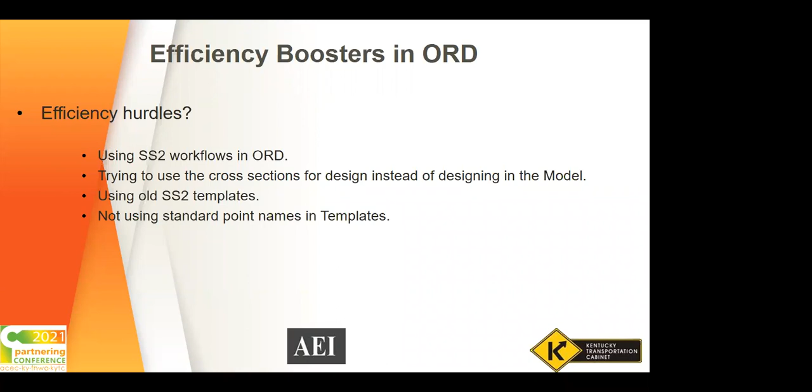We need to stop using the cross sections to design, like we did in SS2. We're supposed to be doing model-based design now. We still see a lot of people going in and trying to edit these cross sections, and it causes a lot of problems downstream. You get a lot of graphics in your cross sections that are basically saved views, and you can't pass that on downstream to our end users.

Another thing we see is using the old SS2 templates and not properly converting them for ORD. What you'll get is inconsistent point names, and the way these annotation groups are set up to display your quantities and annotations.

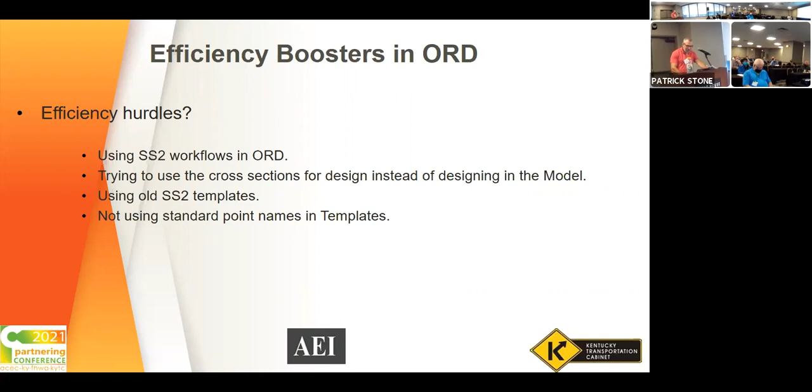Not using the standard point names in templates, just like I was saying before, causes annotation issues.

This is a new sheet border that has been approved from the State Highway Engineer's Office. We released those in the last two releases of CAD standards. The main reason for this change is to align with the named boundaries, as well as to get a little more usable space up on the sheet border.

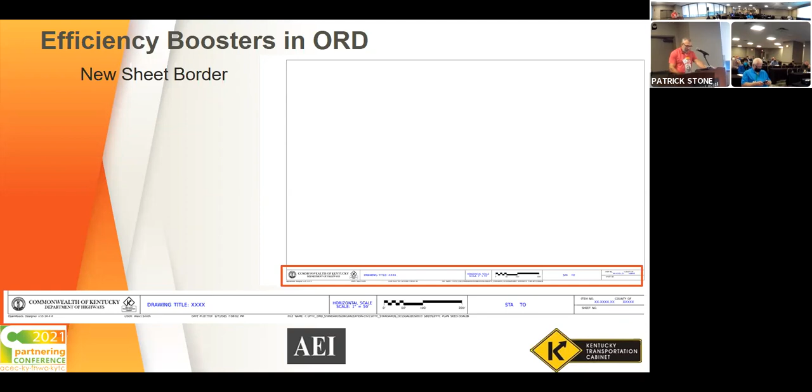One thing I want to point out is the graphic scales on here. We had to pick one to put in there because the plan sheet is one size fits all - you can put any scale on there, 20, 50. So we picked the 50 scale as the graphic. At this point that doesn't automatically update, so your sheets will be 20 scale, but it's still going to say 50.

We're open to suggestions on that. We were going to just make it blank or put question marks down there so you could edit it. But we thought it would be better to place a scale in there so we could hit, you know, most of the time what you're going to be doing, so you don't have to go into every sheet seed and edit those. We're open to suggestions on that.

I wanted to point out the pipe sheet seed for the profile. This is made for SUDA, and Robert Garrett has been doing some training for us on SUDA, and this is where we're going to start doing our pipe sheets. They've been a little problematic in the past, and we've got a system to make these now. This is the first of different scales that'll come, but this one's included in the class.

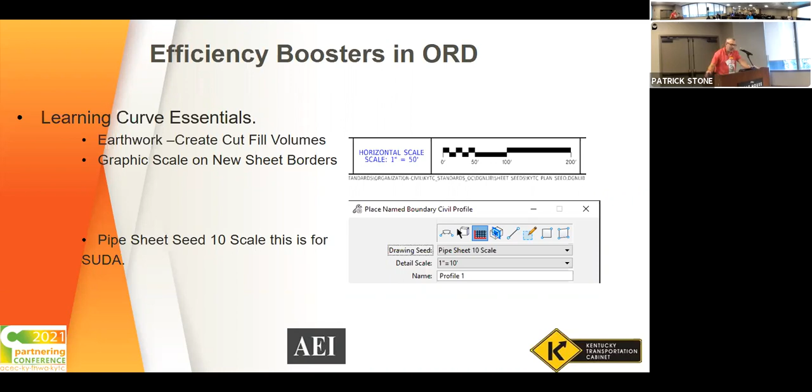Okay, and I'm going to turn it back over to Therese.

So this first video I'm going to play is just kind of an overview of the three different types of models within a DGN: your design model, your drawing model, and your sheet model.

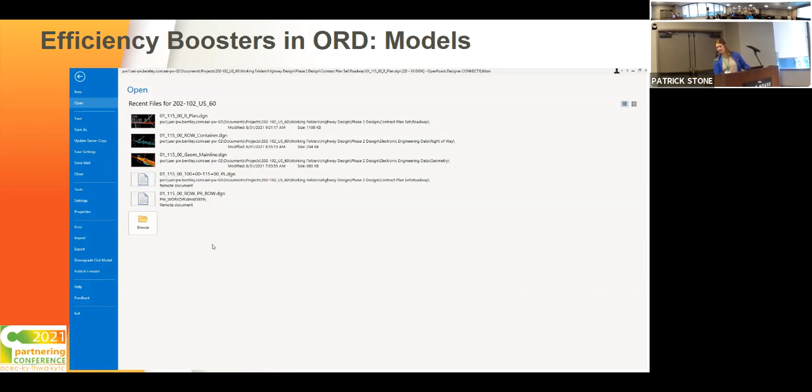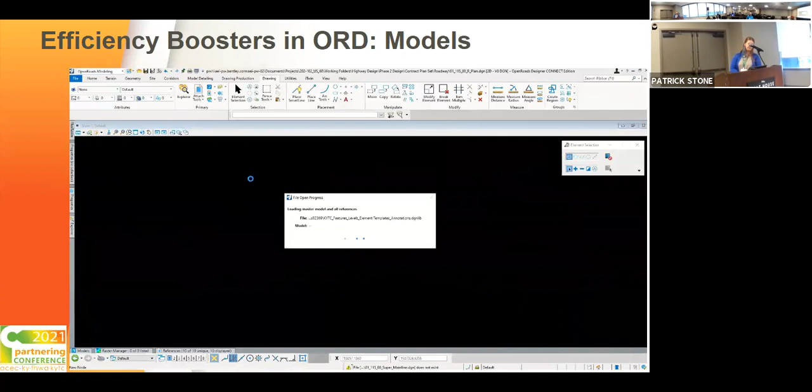So I'm going to open up my plan sheet again. The first thing here is my black background - this is my design model. Down here I look at the models. This icon, a box with a green circle, is for any design models. This design model is housing all my references - sheets, plan sheets. I've attached things such as my geometry, corridor, right of way, existing topo.

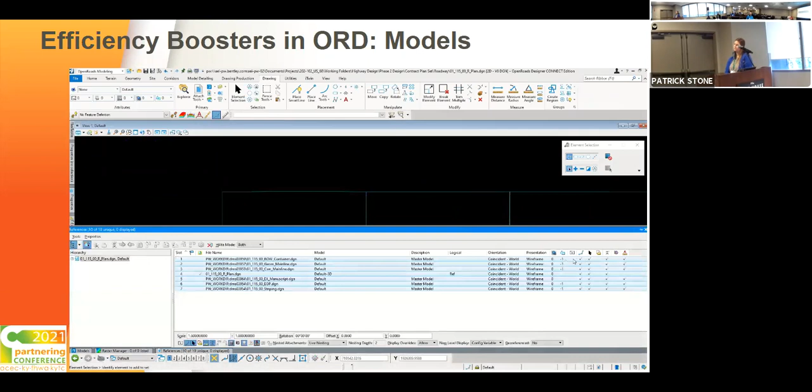You can see these are my main boundaries for my sheets, but all of the line work is just coming from references. So that's kind of your first view, your design model.

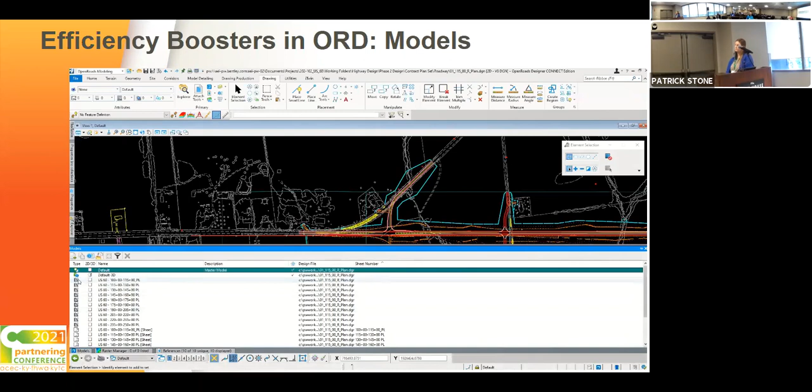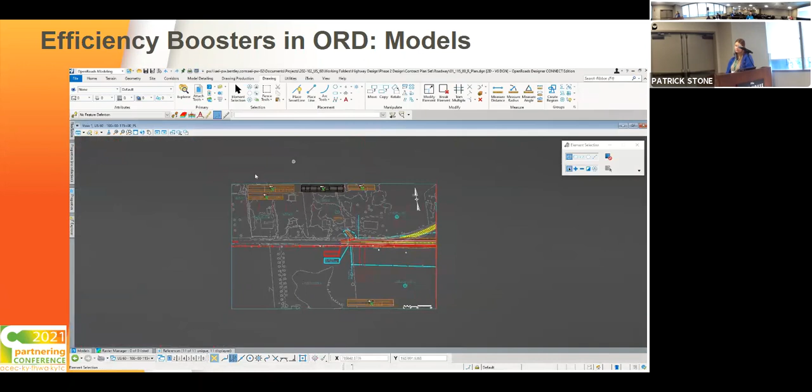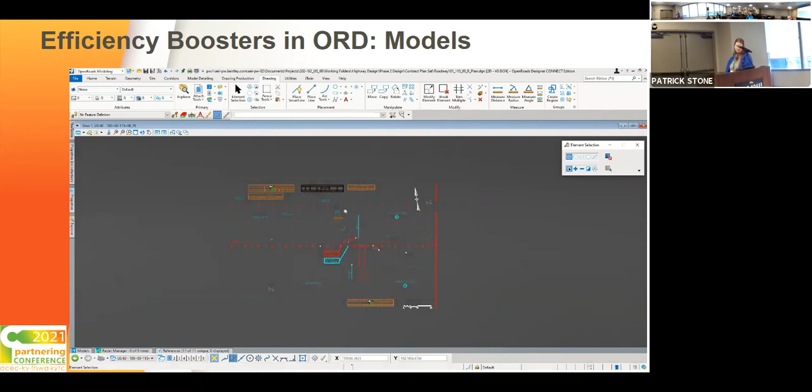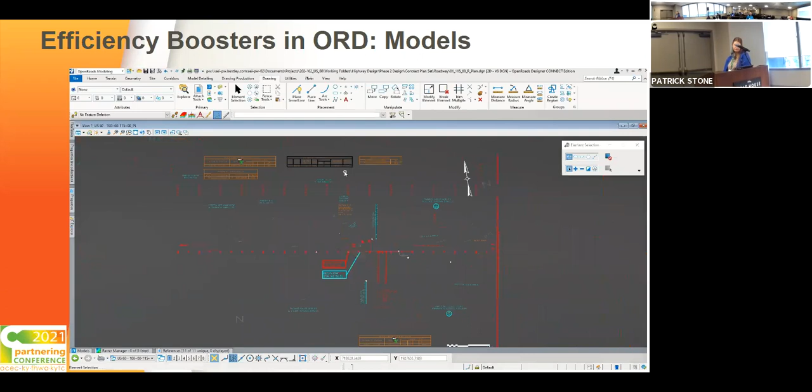Next model I'm going to switch into, that's your gray icon over here - this is your drawing model. You can see this one has a gray background. This is from the same DGN, just a different model, my reference. And if I were to turn that off, you'd see all of my geometries, corridors, right of way, topo all turned off. Only what is active in this drawing model is text, annotations, instructions, north arrow - all of this is active in this model.

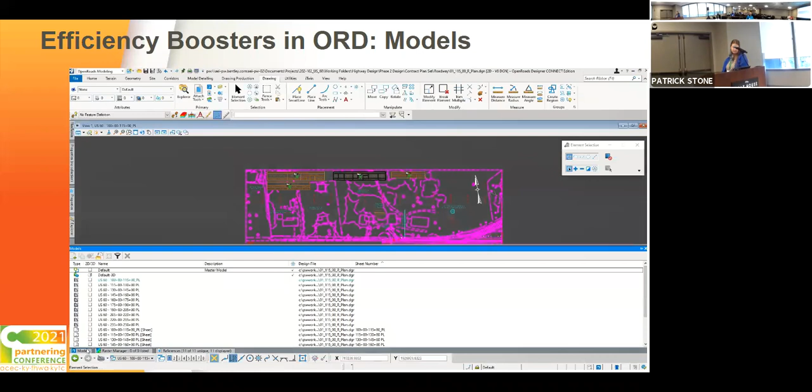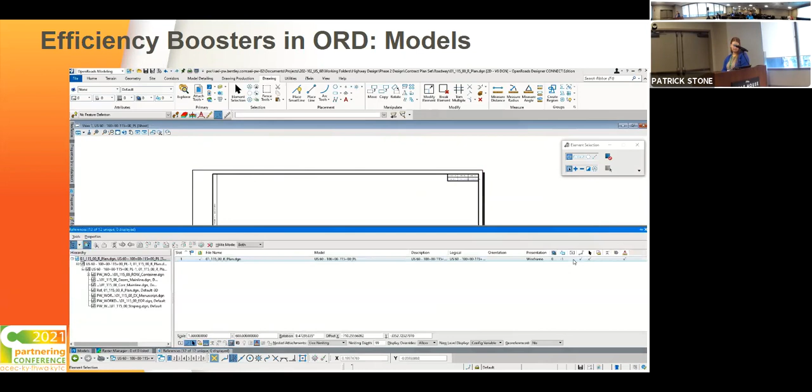Then the last view in this DGN is the sheet view, where again it's all coming from a reference - this time instead of the default model, it's my drawing model that's referenced here. If I were to turn off this reference, all that's in here is my sheet border. This one has the white background, the white icon over here. So that's just kind of an overview of the three different models within this one DGN.

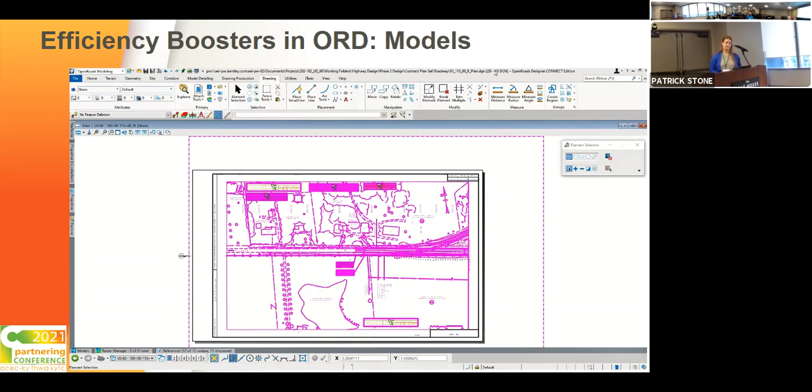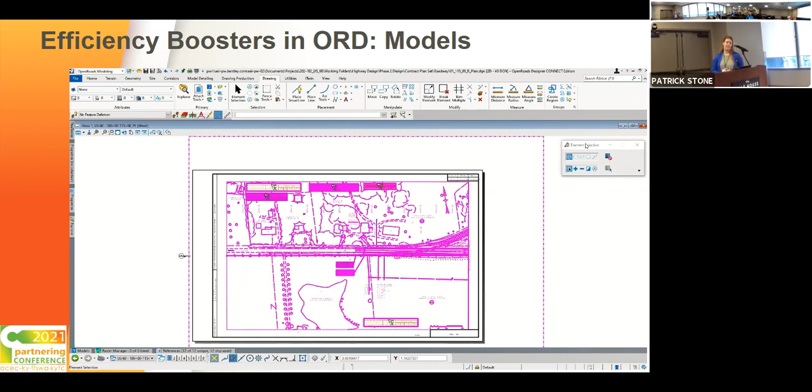So that wraps up that first video, which was just an overview of those three different models.

The next video I have kind of just talks about auto annotation. You can use that for center lines. That's what I do in this video: center lines and right of way annotation, varying distances.

I'm going to go through a few different auto annotations. I'll start with my center line, coming from a reference. All of our auto annotations are set up based on the feature definition.

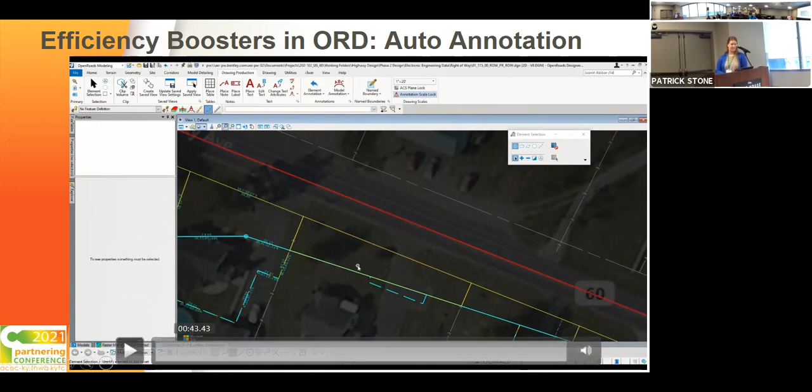And then the last video I have is just on work set properties, on how for your sheet the county and the item number are driven by the work set properties and how to update those. They're going to automatically update in your sheet.

For our sheets, this info in the top right, the county and the item number, these are being auto-generated from the work set properties, which you can find.

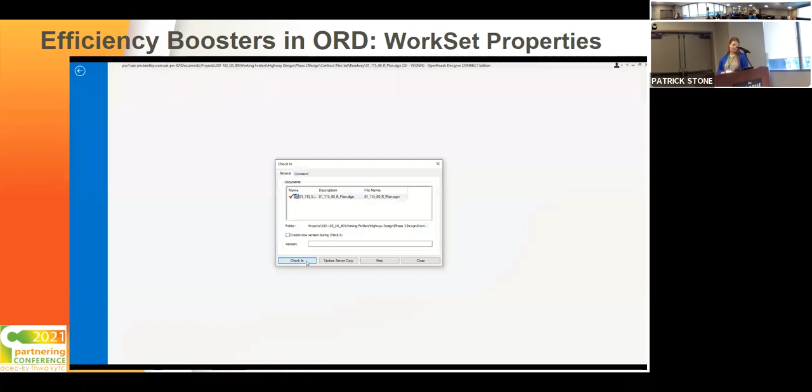File, close. Click here to edit those properties. Here. And you can add a custom property. The sheets are looking for the item number and the county here.

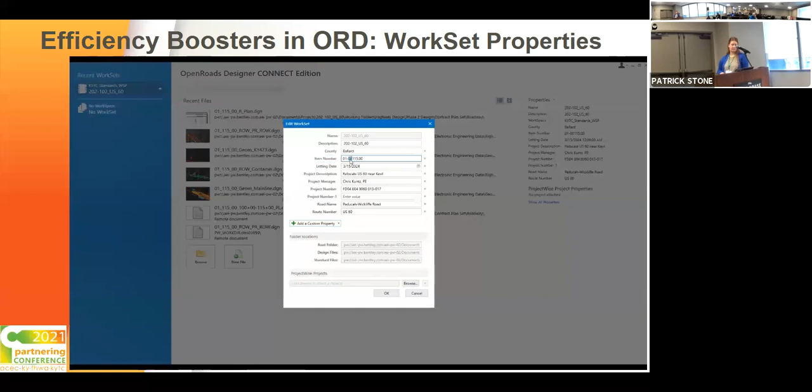So these zeros are added, and I'm going to apply to all. Back here, hit OK, there's the change. And then I'll hop back into the sheet.

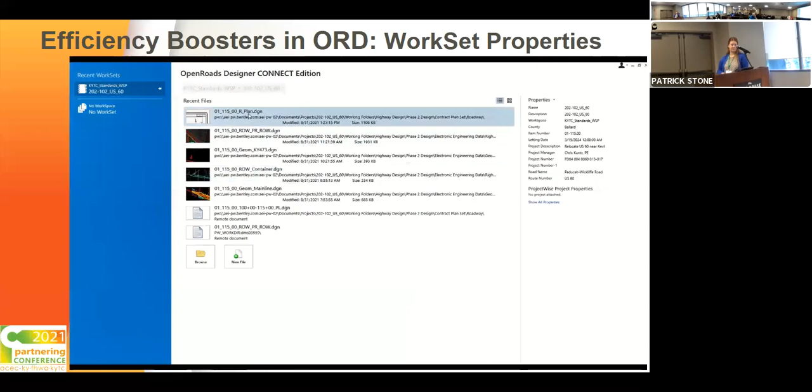And you can see that item number no longer has those two zeros.

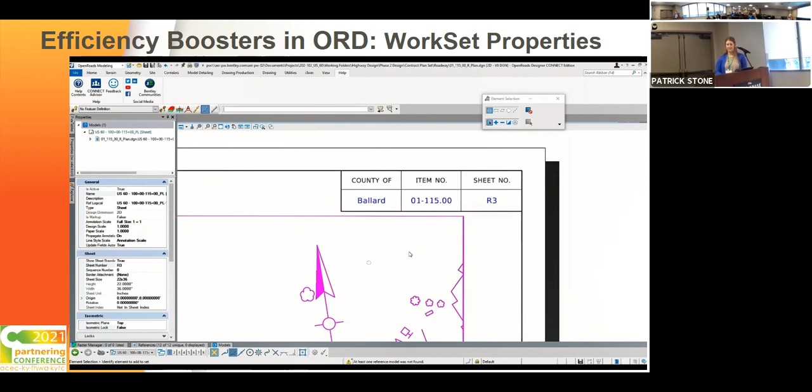So that's it for the work set properties. Next, I believe, is Jason's videos.

So what we're going to show you today - we would love to do a live demo, but trying to do it on Zoom, just to make sure for time efficiency, we went ahead and created these videos. We've got Civil AccuDraw, a pretty powerful tool within OpenRoads, especially with design, more so than plan production. We've got a quick video, and I apologize, I went a little fast with it, but Patrick had mentioned posting these videos to the YouTube link later so y'all can reference them. But I wanted to get everything in.

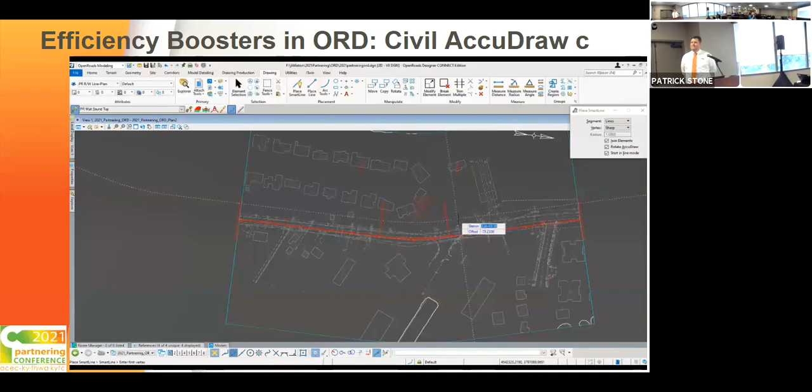First one I'm going to show is the slope. What I like to use this for - I like to keep my vertical PIs at even stations, and I like to keep my grades at even slopes to the extent possible. So with Civil AccuDraw, what I can do is key in my station and what I want my slope to be, and OpenRoads will draw that for me.

The other option I was going to show you is the station elevations. Say I wanted to control, say, the top of a sound wall to a specific elevation - maybe I've got something I need to put in here for these residences here. So I can come in here and say I need my sound wall to start at station 113.40, and the elevation is going to be 465 at the top.

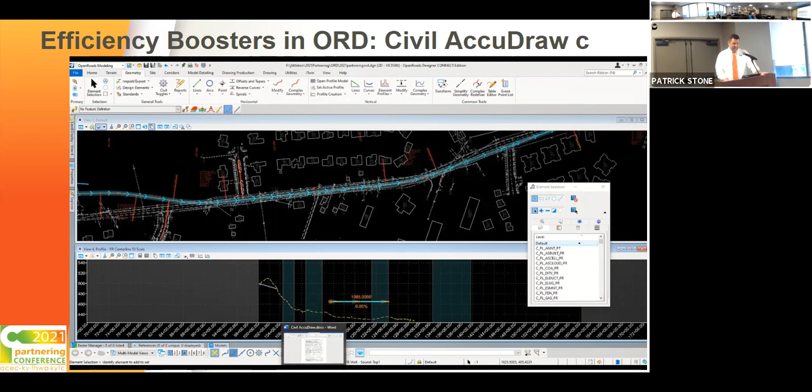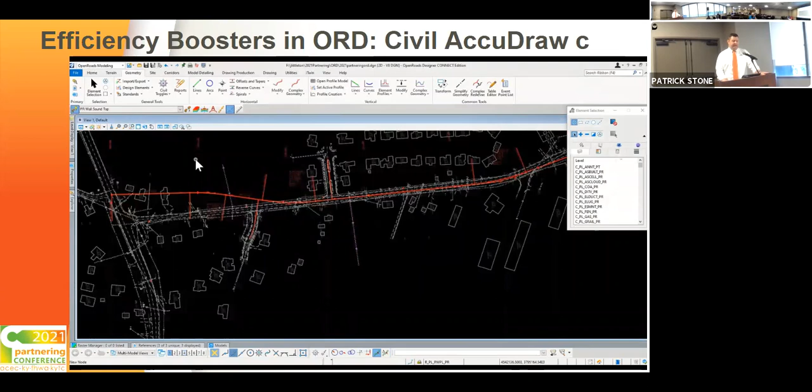So Civil AccuDraw is a very powerful tool. Like I said, just covered a handful of the tools there, but dig in and try to get proficient with those, and you'll find that they're very helpful when you're designing your project.

The next one is more plan production based, but something we found very powerful is using the place table tool, and it's actually available in just MicroStation Connect, but also where ORD is running on top of MicroStation Connect, or the same background information, you still have access to that.

So go through this, just go through a couple little hiccups with the tables that you may have run across and how to navigate through it.

MicroStation or ORD. One note of warning, go ahead and do as much of the formatting for your table in Excel as possible, because when you go and refresh the data later on, it wipes any formatting that you've done in OpenRoads and reverts back to what's set in Excel.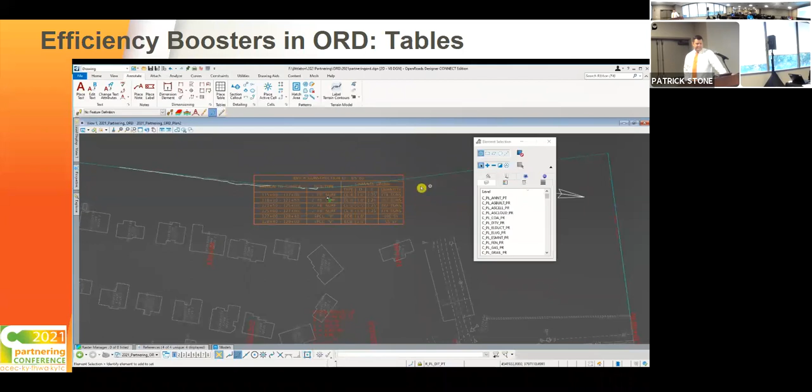Tables are super convenient for summaries. The only downside is the amount of time it takes to actually place a table with that much data. What we've been doing is maintaining the summary tables in Excel and placing them into DGN after most of the anticipated changes have been made.

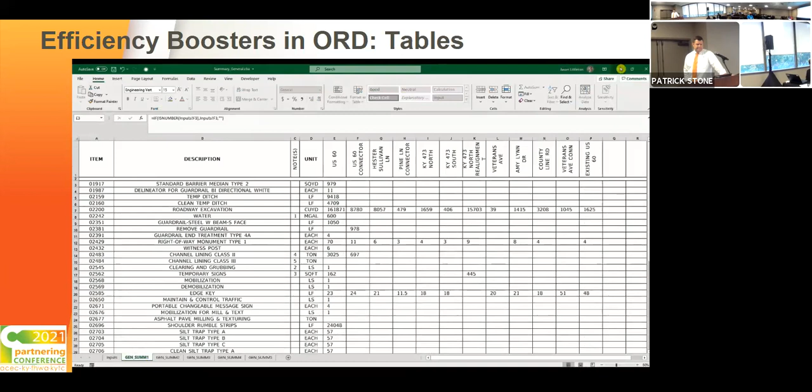So here we can see we've got a running general summary table. What we do is put all our information in here and carry it over to additional tabs as needed, so we can place those tables in smaller chunks to improve the speed with which they get placed. So if I wanted to place that table again, I'm going to...

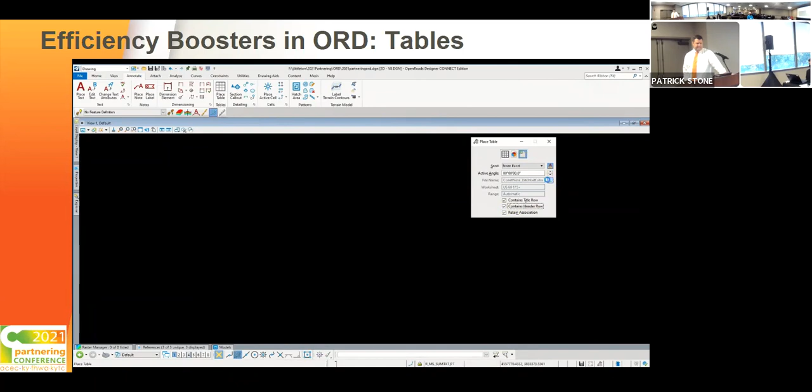Set my element template, and then go and place my table. With this one, I may have a title row, may have a header row, and I want to select my spreadsheet. Now that I've got this pulled up, I can place this general summary tab in here, and it's going to give me a message that, hey, you've got a lot of data in here, you want to preserve the formatting? It'll take a while. Otherwise, we can strip the formatting and it'll be a lot quicker. But I want to keep the formatting that I've got set up in Excel.

And here you see my table. I can place that. Come in here, turn off my fill. And you see the table just disappears, because that's the downside of having black text on a black background. So what you can do is put something behind it on the default level, something that's not going to plot.

So that you can see your data.

All right, so that was the video on tables. Again, really powerful. You can actually have that one running general summary, place that all as one, and break it into subsequent tables. The more data you have in there, the more time it's going to take to place. And it appears that every time you go and make a change to it, it acts like it wants to process it all over again. That's why with the summaries, we have tended to save those to the very end.

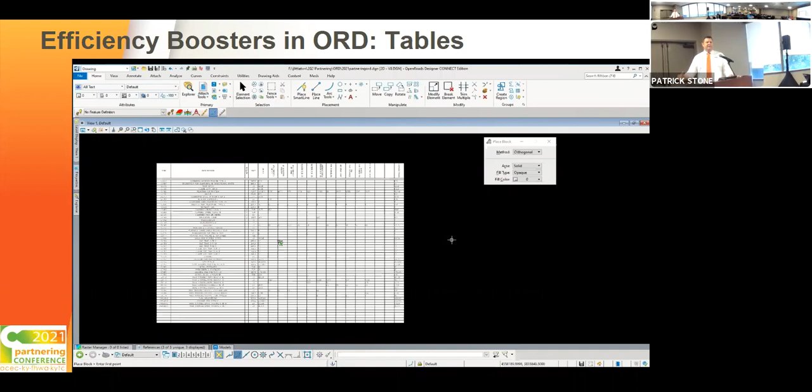As far as getting them on the plan sheet, we still have the Excel file that we can go through and verify everything on. But if we needed to change something, we'd have to go through, sit there, wait for it to update before we could get it actually in there, then turn the fill off. It's an inconvenience, absolutely, but it's a good improvement, I like it. There's a lot more power to it than having somebody go in and just key in all those values. You've got it right there in Excel, and most of us are probably more familiar with that than we are with putting that stuff in the table.

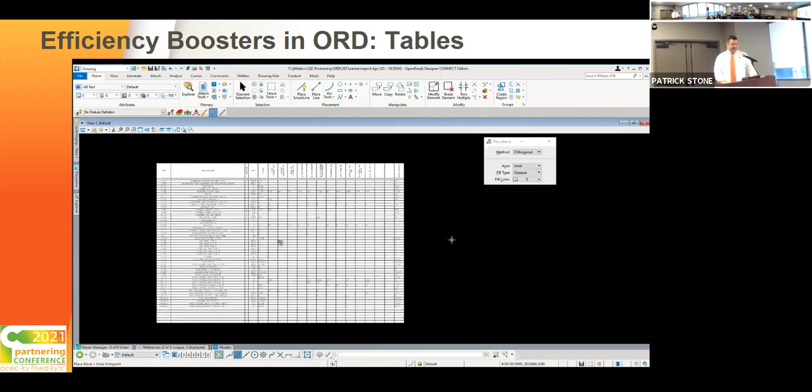So I'll go ahead and send this back over to Patrick to wrap us up. Yeah, we better be quick. I think we only got a couple of minutes, haven't we, Tim?

Okay, I want to talk a little bit about cross-section annotations, template point names, and annotation groups. I want to make sure everyone knows these are all related. You need a basic understanding of how they all work in order to produce these plans. The cross-section annotations are directly linked to the annotation groups. What we see a lot of times is people use an old template and rename the center line. Well, that center line is in an annotation group. Then we'll get calls: I can't get my center line elevation, I can't get quantities. It's because you've renamed these points. If you need to rename them, that's fine, you just need to know the relationship with the annotation group. And if you have trouble, give us a call, we'll be happy to work with you on that.

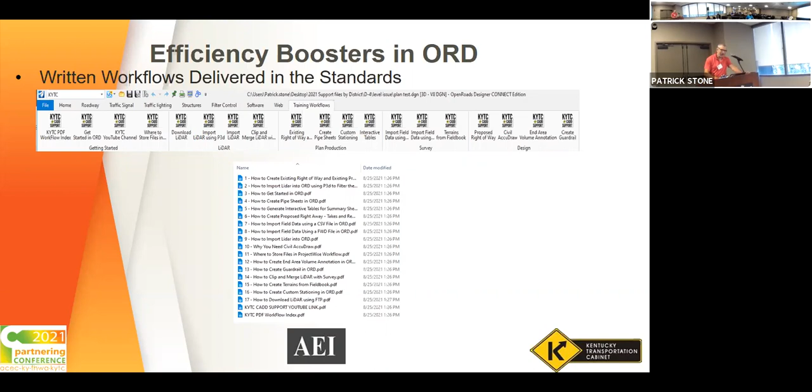And make sure you subscribe to this listserv. That's where you're going to get any updates to the CAD standards or anything else we need to send out that you need to be aware of.